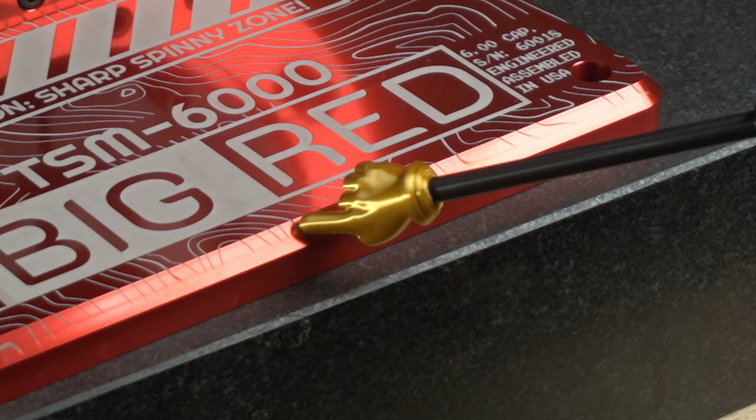Interesting fact about manufacturing is that we've been building things for the entire length of human history. That means for a lot of processes, we have these old words that have just stuck around and carry through to modern manufacturing, but you probably never questioned where the word came from. Bevel, fillet, and pipe. We even have some fictitious terms that have stuck around, like on schedule, on budget.

To break down pipe here, we have to travel back in time to the 1800s. As iron and later steel started to explode in uses, canals, steam engines, water pipes, you had to start standardizing the sizes, or else things just wouldn't fit together, right? And this happened all the time back then. So the industry came together to invent the IPS, iron pipe sizes.

And since pipe was originally used for water, steam, fluids, back in the 1800s without calculators, knowing the inside diameter was probably a good thing because it helped you do your fluid flow calculations, how much water was in a mile-long pipe. So that's where the IPS system came from.

And in the great year of 1862, there's this little thing called the Civil War going on in the US. At that time, there was an engineer out of Philadelphia, really interesting guy named Robert Briggs. And he was saying, wait a second, we're all using the IPS system, but the pipe's not interchangeable from one foundry to the other. So he got all the steel mills in the Philadelphia area together, and we don't have a recording of this, but I'm pretty sure he said something like, make it all the same. Same.

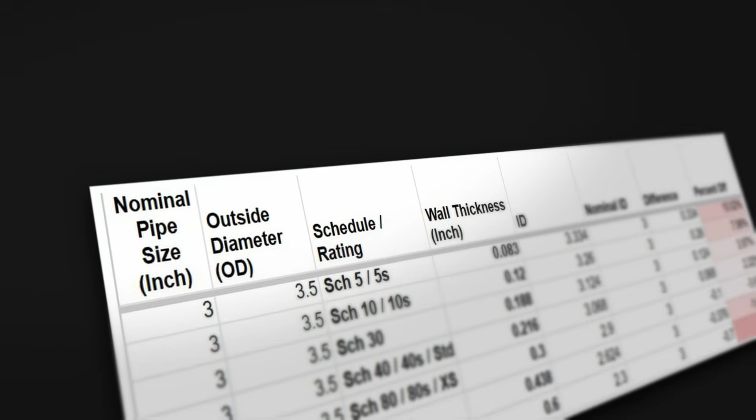Wall schedules in NPS are actually a nifty formula that's just a simple ratio. We're going to take the service pressure divided by the allowable stress in the material times 1,000, so the numbers aren't really, really small, and that gets you a wall schedule. And if you want a stronger pipe, you just go up in wall schedule, starting at schedule 5, and going to schedule 160 and beyond.

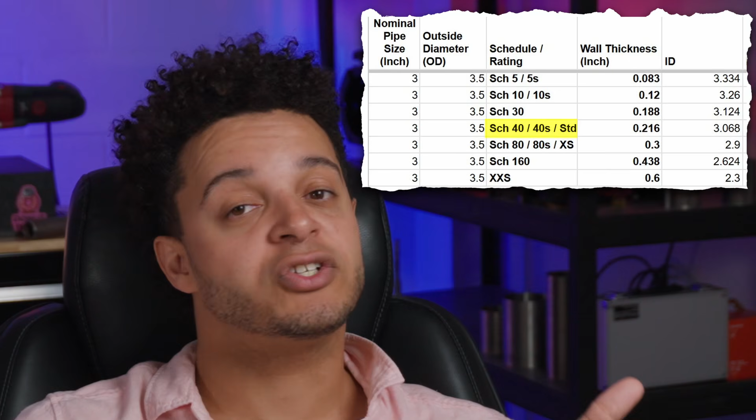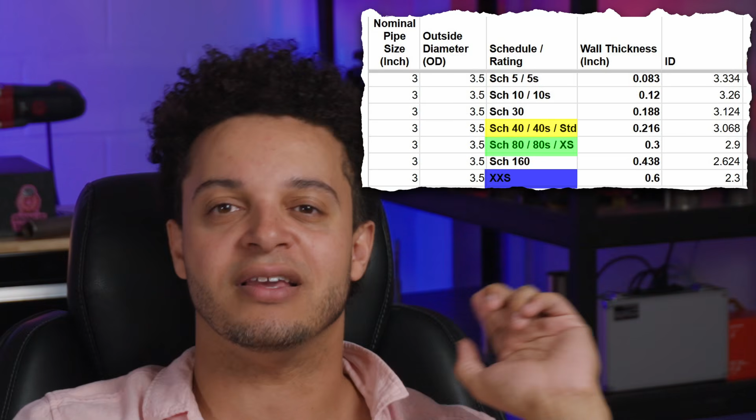And don't worry for you IPS lovers, that didn't go away. Standard strength became schedule 40, extra strong became schedule 80, and double extra strong, well, it was kind of too cool, man, for labels, so it just hangs out somewhere around schedule 160. More on that later.

So up to now, you're probably saying, hey, Joel, this system makes a decent amount of sense. We got the same outside diameter, so our pipe wrenches and flanges all work together. And then we have a nominal ID that we're going to label everything off of. And we have a wall schedule based on a mechanical strength ratio. Pretty straightforward. And here's where the accumulated weight of almost 200 years of using a nominal system from the 1800s starts to just fall apart.

Oh my, where should we start? Let's do it rapid fire. Engineer Briggs was concerned with 0 to 4 inch pipe systems. So when they created NPS, they expanded those numbers, made them a little bit closer to nominal, and as they keep on getting bigger and bigger, they keep on getting more and more issues.

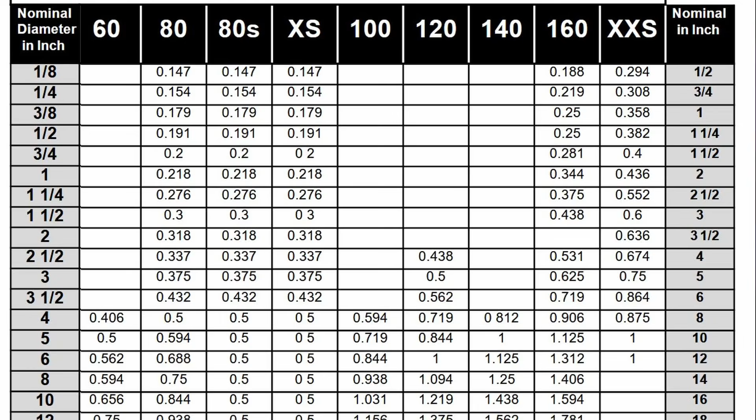So if you have any level of precision, you're gonna have to go look it up in a book anyways, because nominally 1 inch is not great when the actual pipe is 0.957 inches, and that's still pretty close. Some of the pipe schedules are egregiously off in the ID. Different NPS schedules can have the same ID, you know, the thing they're nominally being measured on. So 2-inch schedule 30 and 2.5-inch schedule 160 both have the same ID of 2 1/8 inches. Good thing neither of those are 2 or 2.5 inches, but they're the same. That's kind of confusing. Oh no.

Because wall thickness keeps on growing as you get into larger and larger sizes, 12-inch pipe, which is actually 12.75 on the OD, is the last time they use this system. When you go over to 14, they switch over to tubing dimensions. So 14-inch pipe is 14 inches on the OD. 12-inch pipe is 12.75 inches. Even the pipe schedule people admit that this system is silly and breaks down. You're welcome. Are you less confused now?

All these oddities I could work around until we got to this. Wait, hold on, let me grab it. This is 1-inch schedule. I actually don't know the schedule. It's not labeled. This is 1-inch stainless steel pipe. This is where all the issues just start compounding.

Remember how earlier I said pipe wall schedules were based on a ratio? I'm going to take the service pressure divided by the allowable stress in the material. Well, common grades of stainless steel are stronger than the common grades of carbon steel you would use in pipe. That means for the same amount of pressure, you need thinner walls in stainless steel, which means you got to change your schedules. I'm going to put this down. But to help you out, they made it easy.

Below 12 inches, carbon steel and stainless steel pipe schedules are the same. Above 12 inches, they actually differ. And to help you out, they'll put a little S on the charts. So now you'll see Schedule 40 and Schedule 40S. Nifty. What this means though, is that you have two things you're gonna commonly refer to as like 16-inch Schedule 40, but their dimensions are gonna change. And as I said earlier, different schedules can have the same ID. So where does that leave us?

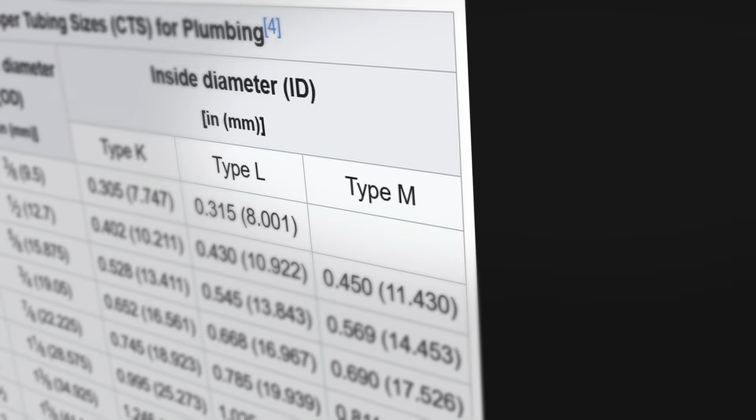Yes, that's a little confusing. What is commonly known as copper pipe is measured by the copper tube size, but it's copper pipe, hence copper tube size. Just let that marinate for a second. Clarity. And I know what you might be saying, well, hey Joel, that's not so bad. Copper pipe just kind of follows the NPS naming system, right? Right? Oh my God, in comes copper ACR tube.

Oh no. HVAC and refrigeration uses the ACR system, which stands for air conditioning and refrigeration. I'm not really sure who won that HVAC ACR acronym war, but there you go. Now, ACR, being the good boy that it is, uses a tube dimensioning system, so the actual OD is the OD, and the actual wall thickness is the wall thickness, and there you go. That's all I have to explain.

Pretty straightforward. Little side note, in copper you also have annealed, called soft tubing, and rigid or drawn, often called hard tubing. But there you go. That's all there is to it. ACR, you're a good boy.

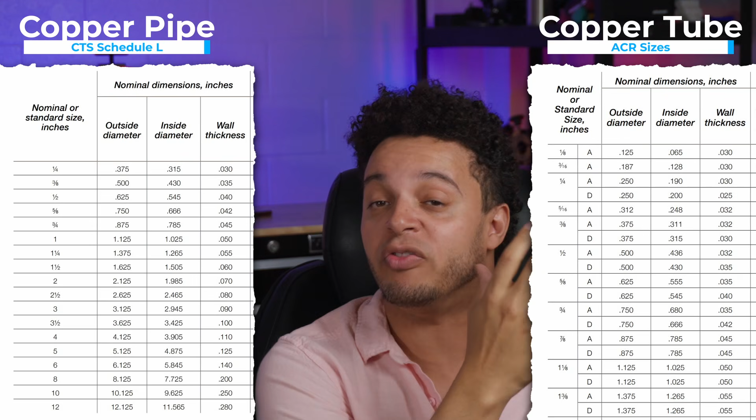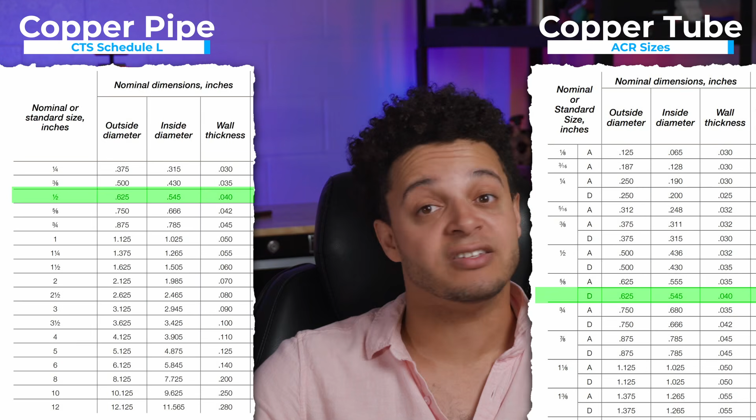But to both help you and confuse you, CTS Schedule L pipe and ACR tubing share the same dimensions. They're the same thing. That means the same physical dimensions with two different naming sizes that are in use at the same time. If you walk into that big box store and you ask for 1/2" Schedule L copper pipe, then you turn back and walk in and ask for 5/8 ACR tube, they're gonna hand you the same piece of tube pipe because they often dual certify the material. And there's some minor differences between ACR tube and pipe, but they share the same dimensions.

Is this making any sense to you? If I tell you to grab the 1/2" copper pipe, are you grabbing 1/2" copper pipe using the copper tube sizing system? Are you grabbing 1/2" copper tube using the ACR system? Or are you grabbing 5/8" ACR tube, which happens to share the same dimensions as 1/2" copper pipe that uses the copper tube sizing system? Boy, does this cause a lot of mistakes.

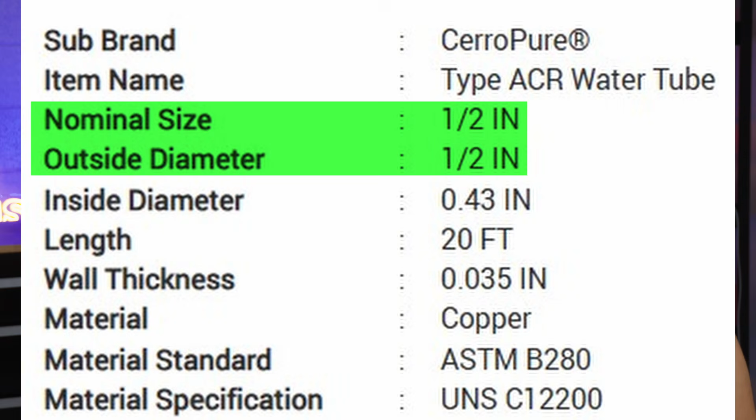And I think what's particularly egregious about this is that homes have copper water pipes. Homes also have HVAC and refrigeration systems. So if you walk into that big box store, they're gonna put the copper tube next to the copper pipe. And they just expect that every handyman, every weekend warrior, everyone buying this is gonna intrinsically know that copper pipe is an 1/8 off on its diameters and copper tube has the actual correct outside diameter, but they're gonna be next to each other. And so if you measure something in your house, you could easily grab the wrong one.

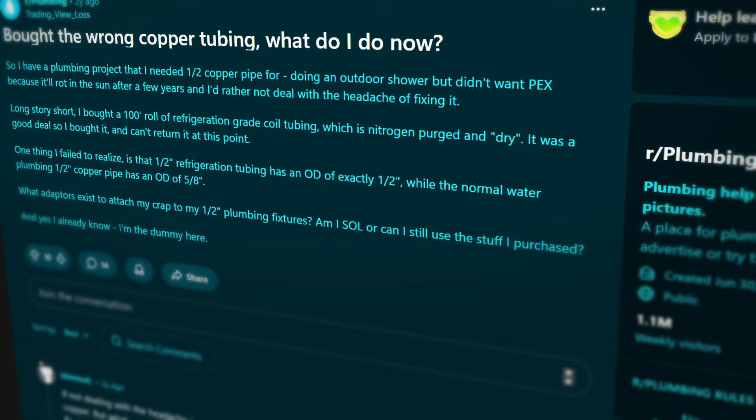Oh my gosh, people spend a lot of money making these mistakes, and plumbers probably scoff and laugh a lot because when they open up walls, they're gonna find copper tube, even though it probably should have been copper pipe. The copper pipe systems are just causing havoc, folks. They just sow chaos wherever they go in tubular form.

But Joel, what about the metric system? I don't like this anymore. I'm starting to get tired. Metric pipe, they use ISO standard 6708. They also call it DN, which stands for diameter nominal, which means, oh shoot, let me look that up. Diameter nominal is French for nominal diameter.

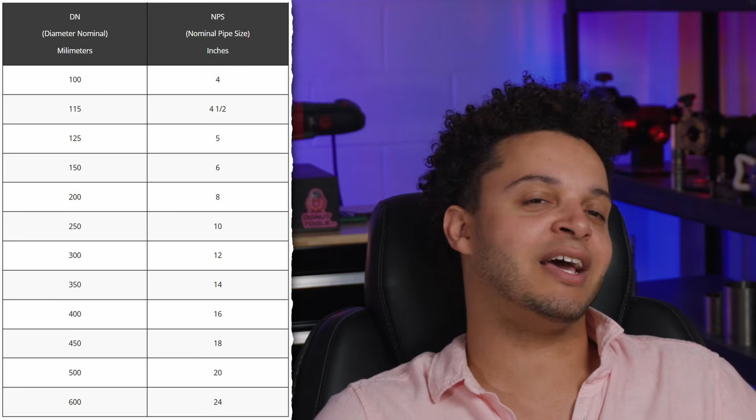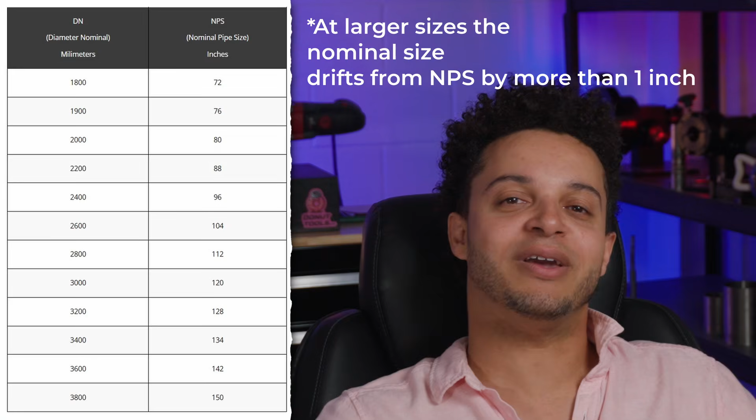Huh. Metric was supposed to be the chosen one, and I think they just gave up, because they just take the NPS sizes and multiply it by 25 because I guess 25 millimeters are roughly an inch. Right, guys? Right, guys? 25 millimeters to an inch. Why not? ISO pipe also has a nominal measuring system. The numbers just don't matter at this point. I feel like ISO just copied ASTM's homework and turned it in late, and they just kind of gave up on even trying to have this stuff make sense.

But Joel, what about aluminum pipe? Will this ever end? Aluminum pipe just follows NPS pipe schedules, even though that stress calculation ratio formula now doesn't make sense. Whatever. I don't see a lot of aluminum pipe anyways. It's stupid, but it exists. Most people just use aluminum tube.

But Joel, what about PVC pipe? Just stop. Just stop. Common sense is already dead. I don't like this. I don't like this anymore. PVC pipe, I'm not even gonna try. It uses a bunch of different systems. Some of them match NPS, most of them don't. If you want to do it, do what the world-class people do and just look it up in a chart. Just stop. I'm tired.

Oh boy. So to break this all down to you, where does that leave us? Just to refresh, pipe systems were based on schedules. These schedules came from the 1800s. Different industries had different uses in mind, so they all made their own different piping schedules for their uses. Now, 200 years later, we're just living in the ghosts and shadows of people who named something in the 1800s.

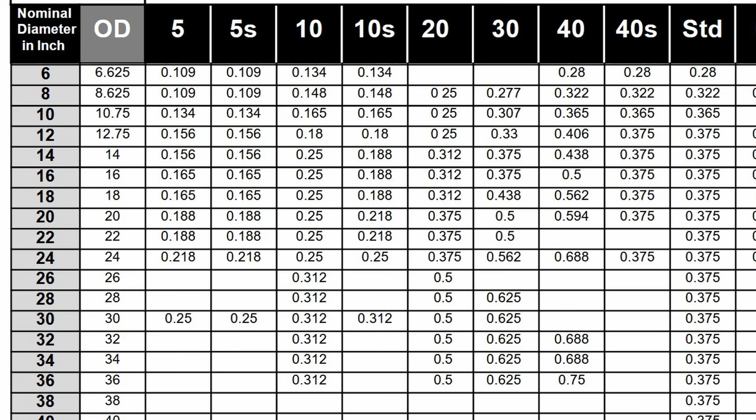And the engineer, who was a smart guy, is like, dude, I don't get it. I've designed and spec'd a lot of flanges, and in every case, the carbon steel and the stainless steel flanges are the same. Why would I have to think that when I look up Schedule 40 above 12 inches, I should assume that the flange dimensions change from carbon steel to stainless steel? And frankly, stainless steel pipe in those dimensions is so rare anyway, it's not like people are tripping over to explain this to you every single day.

We also find plenty of stories of people on the internet buying thousands of feet of copper pipe, or copper tube, it shows up on the work site and it's the wrong thing. And these mistakes happen all the time, and I really don't blame people for not understanding the difference. You grab the wrong one, you spec the wrong one, you show up as the welders and fabricators, you just make it work, and then months to years later, the whole thing explodes.

And I know this is a lighthearted video, but people have died because someone spec'd tube instead of pipe, someone installed pipe instead of tube, someone grabbed the wrong size because when something said 1 inch nominally, no dimension is 1 inch, but that was a pretty reasonable assumption to make, one would think. We live in a world where you have a tubular thing that has two different naming schemas. One makes perfect sense. One says the wrong thing all the time, is all colloquial, none of the numbers make sense, and they're used at the same time, but they're not interchangeable.

And as you can see, the difference between tube and pipe is not a semantic distinction. It actually matters. So if I seem a little hard on pipe schedules, it's because I really don't think they're a good system. And I want to go into some of the technical reasons why. I'll start on the quality side.

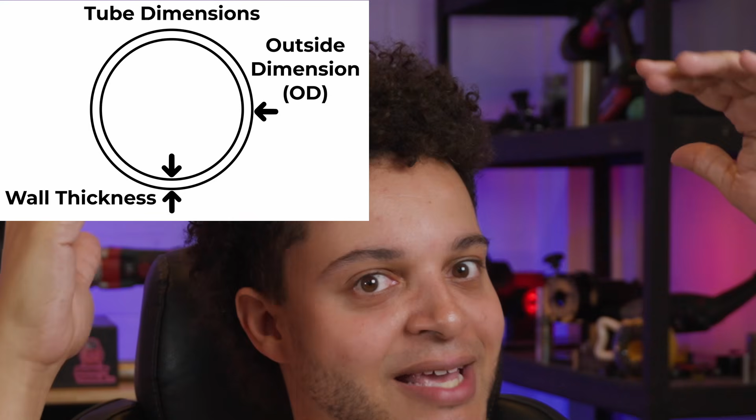I want you to think about this from a dimensional standpoint. There's only two dimensions you need to fully define tube or pipe. It's the outside diameter and it's the wall thickness. And in fact, pipe schedules actually use the outside diameter in their technical definition, but then they give you a nominal inside diameter that's not even right. Come on, we don't do this with any other material, angle iron, square tubing. We don't just use nominal systems.

Are you really saving time when you have to look it all up in a book anyways? Is it really a good shortcut to say, yeah, I guess this is about 1 inch? Come on. We're using more syllables to describe a two-dimension thing. Really, it only takes 2 dimensions to properly label a tube. It just feels ridiculous to me.

So where does that leave us here? How do we go forward? The good news is I have a solution. It's incredibly cheap. It's super easy. Guys, I'm not even asking you to give up pipe and give up those sweet, tasty pipe dimensions. Please keep them. You ready for the solution? All you have to do is start dimensioning pipe like you dimension tube. It's not 1 inch pipe, it's 1.315 inch tube with 0.133 wall. There you go. Was that so much harder than 1 inch Schedule 40 pipe? Frankly, it's about the same amount of syllables anyways.